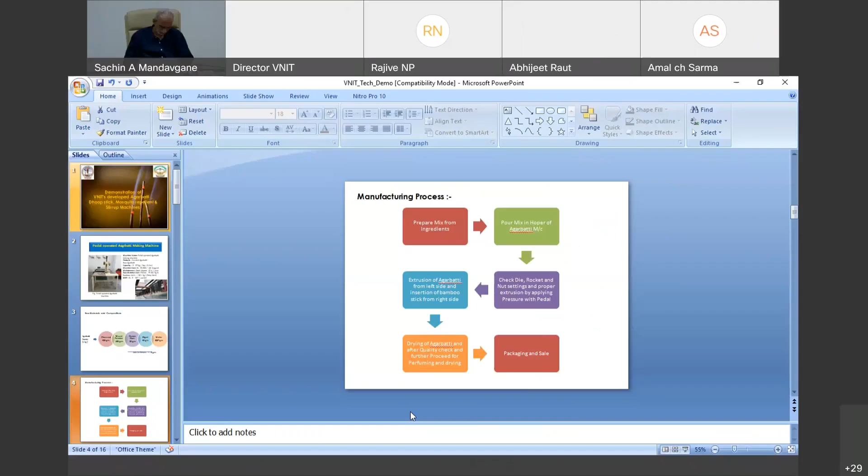Abhijeet's introduction is, as director sir said, Abhijeet is a PhD scholar at VNIT under the director. Second, he is a certified trainer for the agarbatti making machine, and he is contributing to different KVIC projects as well. So Abhijeet, please start.

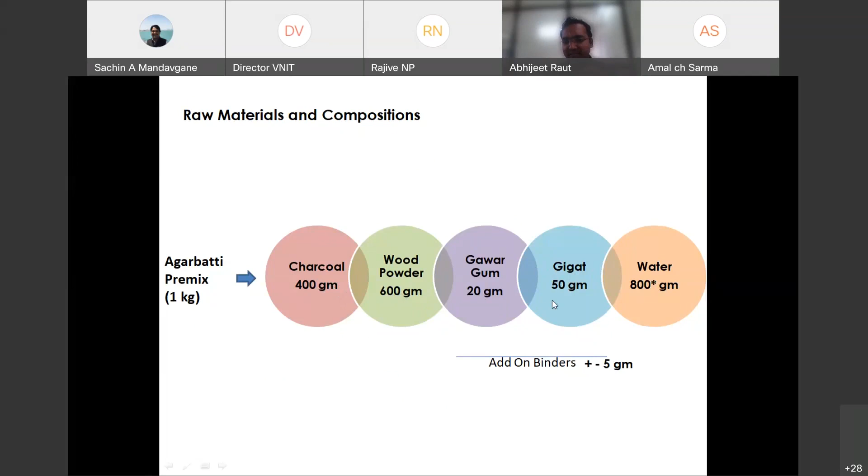Now we will move ahead. As I told you, for agarbatti manufacturing we require the premix, the mix of materials, the bamboo stick, and a machine for processing. So how is it done? First, initially we will prepare the mix. I'm going to demonstrate with a video, but initially let's discuss it in short. As I told you, these are the ingredients. We first mix it properly, initially charcoal and wood powder. Then we add the binder agent and pour the water, preparing the mix like an atta dough you have seen.

In such a manner we have to prepare the mix. After that, we need to pour that mix, masala we can say in local language, into the agarbatti making machine. You have seen this is the hopper, is it visible? We will pour that masala over here. After pouring the masala over here, we are going to move this handle. You can see my arrow is visible. Okay, so we will move this handle.

So with respect to this movement, the piston will move downward, and it will apply pressure on that dough.

After some time, as we feel the pressure, we will shift the movement of the hand on the pedal, and with the foot, we will apply pressure on this masala. After that, we need to do some adjustment for the extrusion. We will check whether this masala is coming out properly, and with respect to applying pressure, we need to check the extrusion properly.

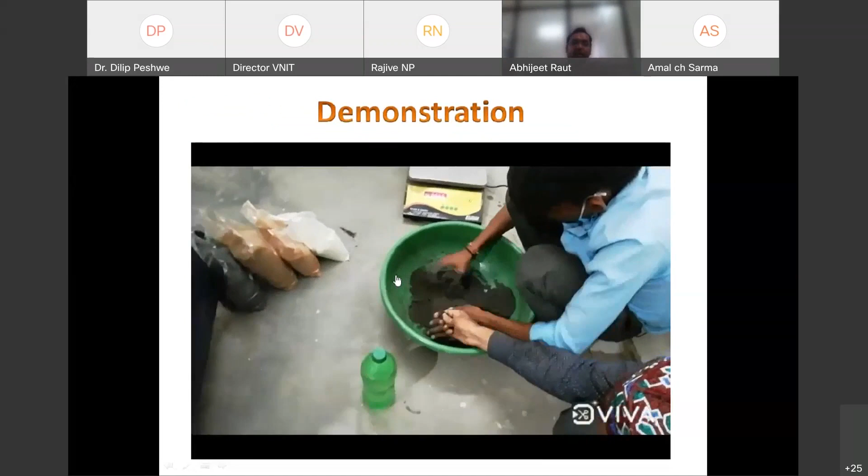Okay, understood. So now we are watching the demonstration. You can see we are preparing the masala, the mixture or premix. We take a tub and mix the various ingredients. This is for the black coating agarbatti, black premix.

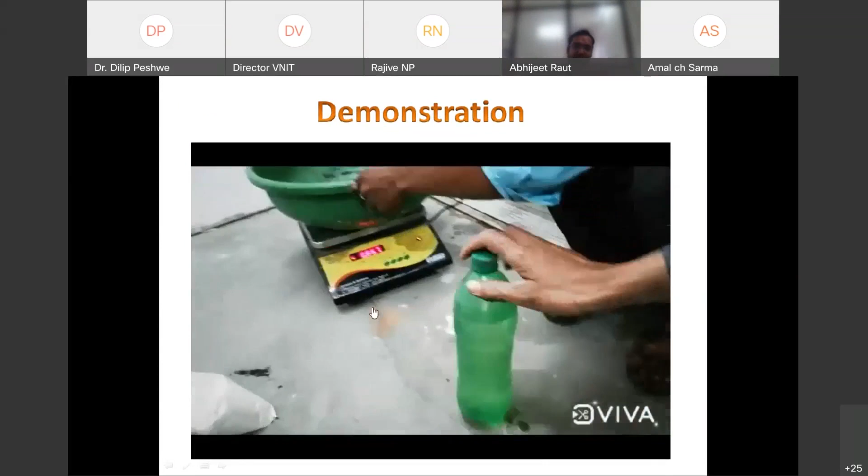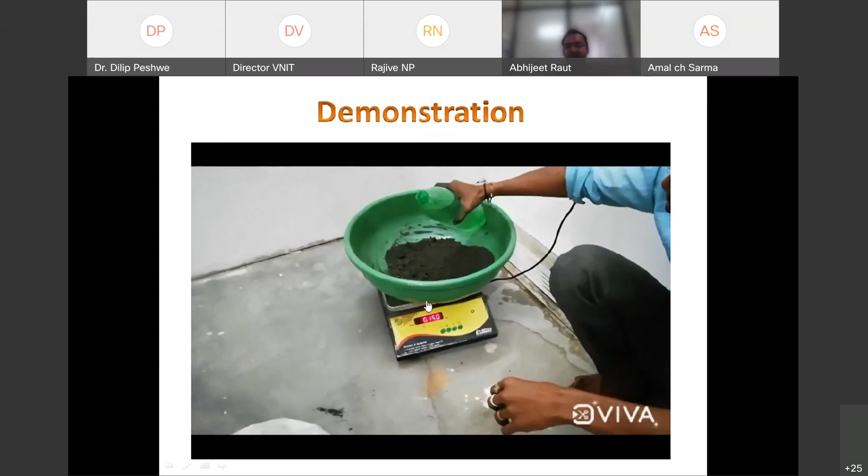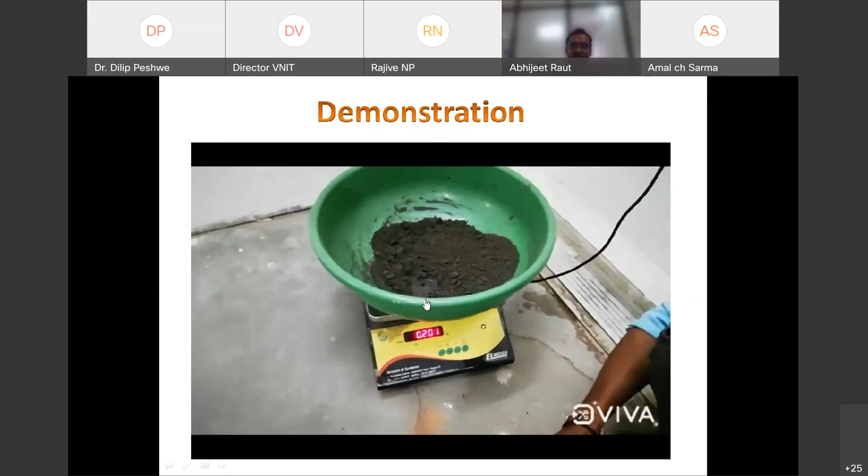You also require a weighing machine - this is a sample, so you can use any portable weighing machine. You can see we are pouring the water, so it is hand-based mixing. If the quantity is very small, you can mix it by hand, but if your production is very high and you require raw materials in tons, you can use a mixer machine instead. There are dedicated mixer machines with a reverse-forward arrangement for this mixing purpose.

It's as simple as the roti making you've seen in your kitchens. We need to prepare the dough like that. You can see this is the stack of materials.

We need to check whether it is bound properly. This is mixed properly, and finally after pouring the water we need to check like this - you can see the finish. We need to check that it binds like a laddu, you can see this checking also - it's like a sticky surface.

Then we confirm the material is okay, the mix masala is okay. You can see we are checking by making a laddu-like shape, and then with the thumb we check if it's sticky, how the surface is.

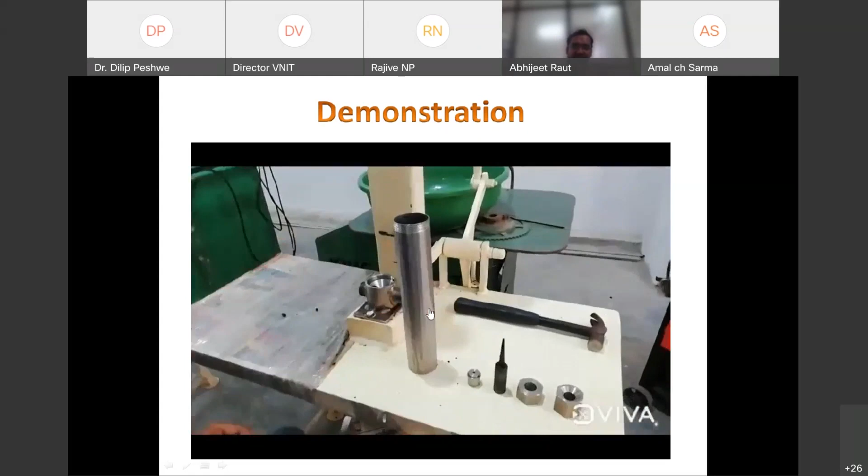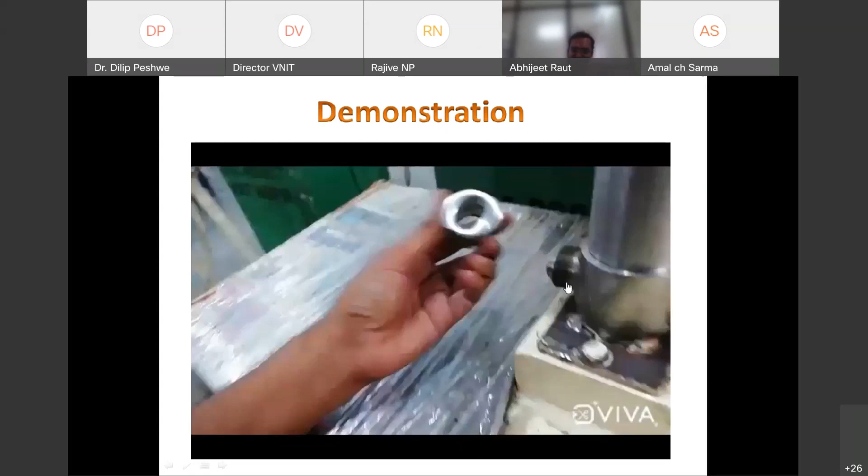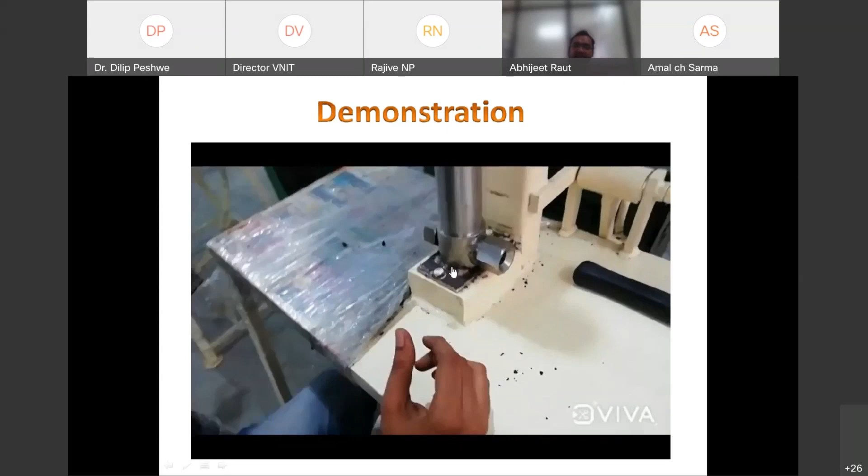You can see we will first incorporate the hopper assembly. This is a rocket, and this is a die. We will insert the die from one side. This is a small nut, as I said, and this is the big nut, the larger nut. This is the assembly, and we need to check it.

Initially, we keep it tight, and then as I told you, we need to check the extrusion. At that time, we move those clockwise, anti-clockwise, and set that proper assembly. Like you can see, there is a locking arrangement.

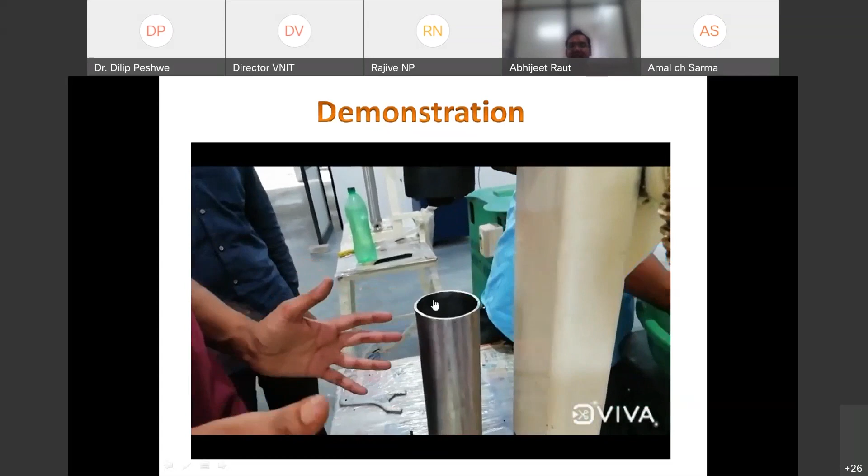This is the bush. We will be inserting this masala in this particular hopper. This is a bush which is going to apply the pressure over here. This is the handle.

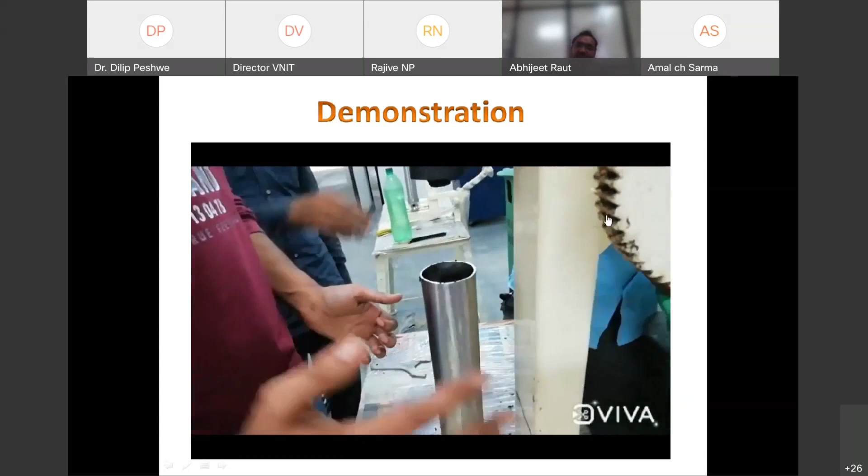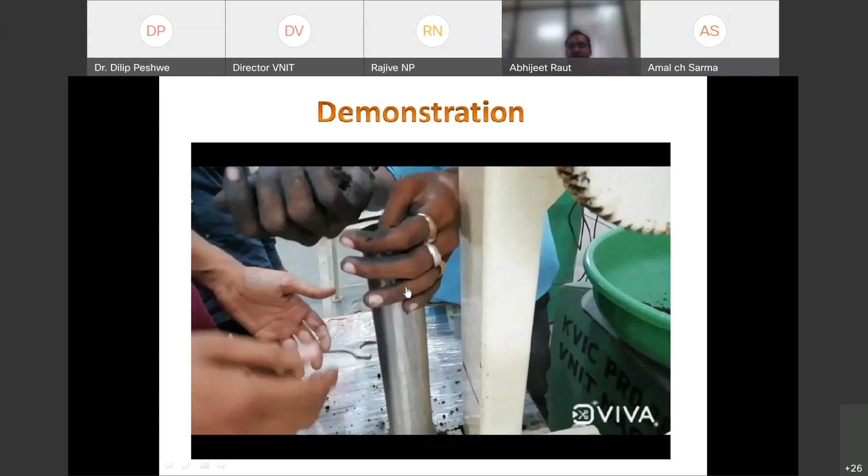Right side you can see this is a gear with handle. Initially we are going to apply the pressure with the help of this handle. 80% of the hopper we used to fill with that masala over here. Now see, after that we are going to lock that particular joint and we are moving this handle.

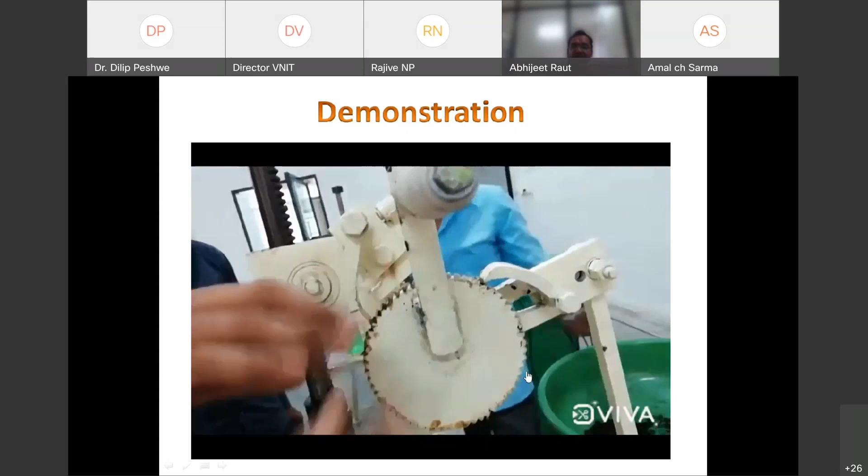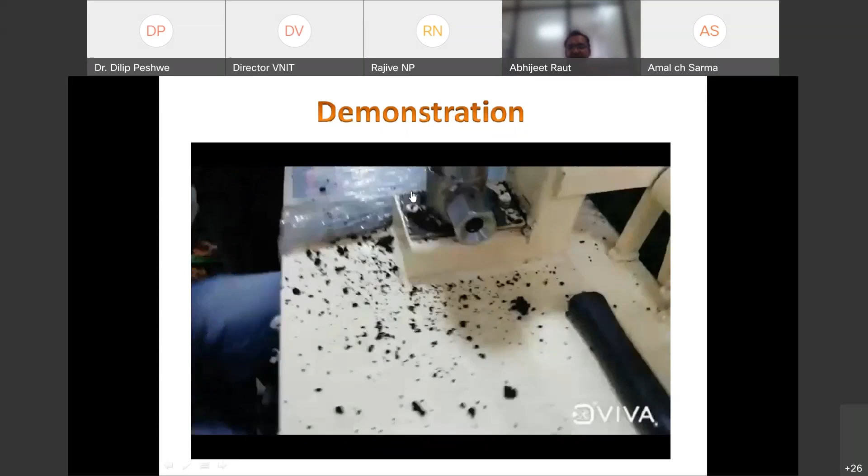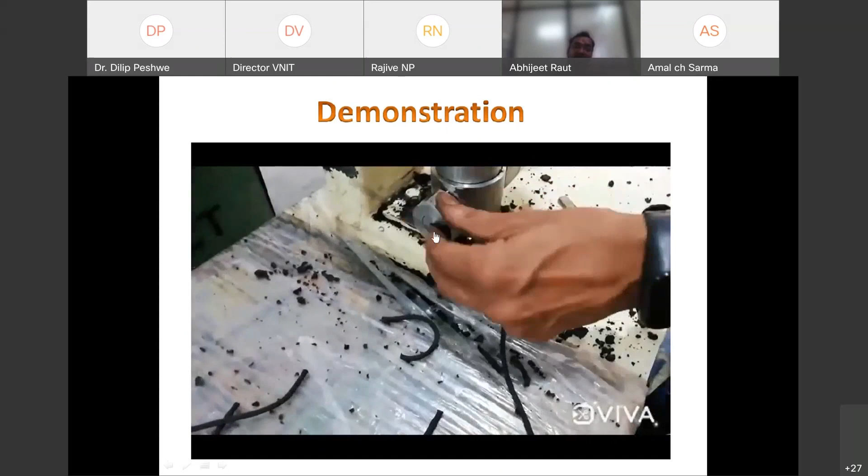And when we feel that there is some pressure, we need to shift on pedal, then we will apply the pressure with the pedal. You can see, before that we need to check the extrusion is properly done or not, and then we are inserting this bamboo stick from the opposite side, and this agarbatti will come out from this.

If there is a problem with the finishing of this coating, we need to set this nut arrangement. Sometimes what happens is if any ingredient, mostly water, or jiggat increases, it may affect the extrusion. So we need to set this setting as well.

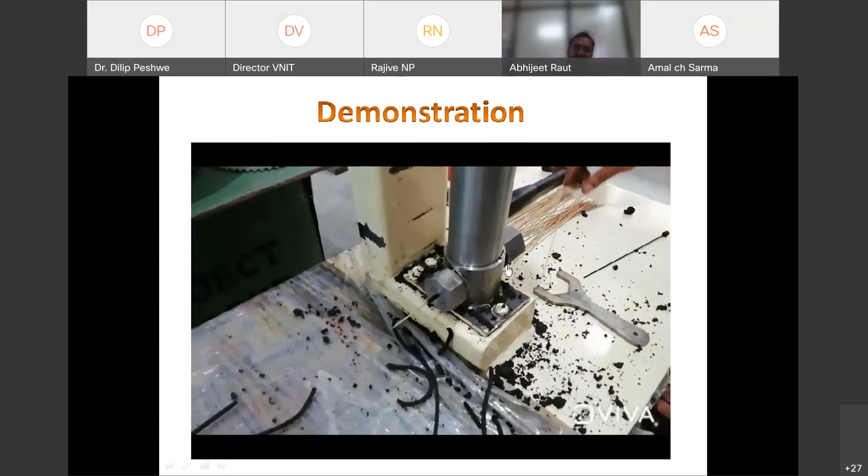You can observe this from another side. We are inserting the bamboo stick. In that fashion, we got the agarbattis.

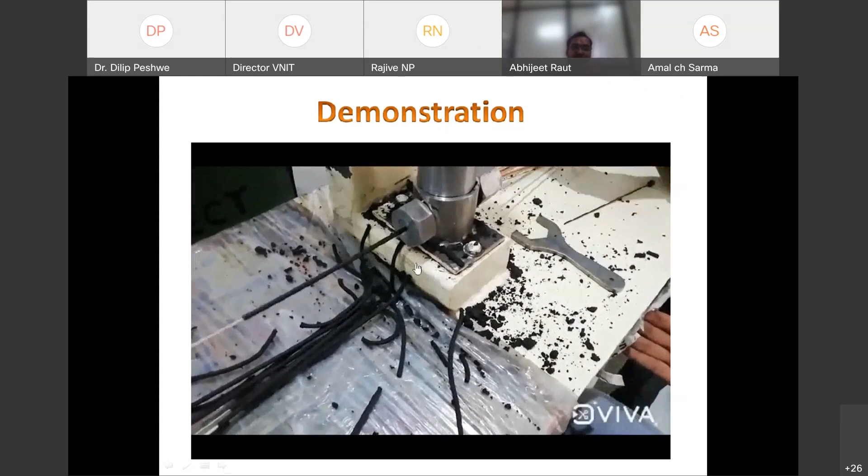Sometimes it also happens that there may be obstruction with the dust. So we need to maintain this every time. We need to remove that nut and we have to clean that die as well.

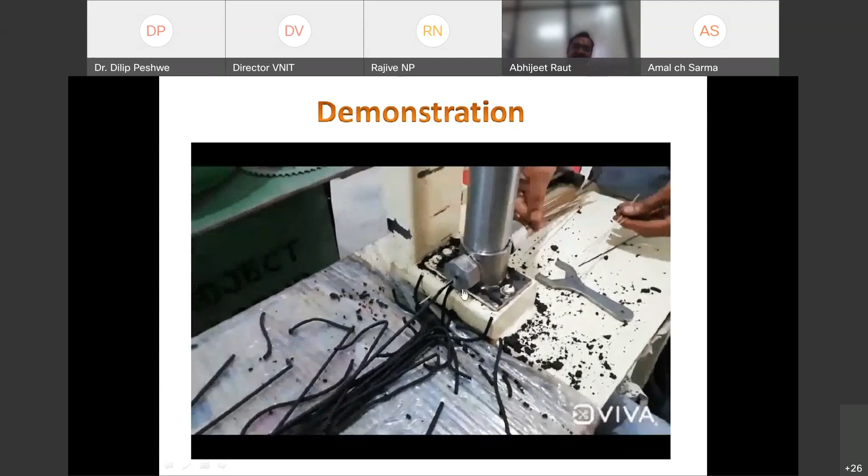There is no wastage. We can use this other coating again. We used to insert that remaining coating into the hopper again. So there is no wastage as such. So this was the agarbatti, which is very widely used in our country.

So our next technology, which VNIT has developed earlier, is the dhoop stick making machine, which is also useful for the aroma industry.

So you can see this is a manual dhoop stick making machine. The product, same as before, which we can produce from this particular machine, is dhoop sticks. Currently we are going to discuss the Gomay dhoop, organic, or we can say herbal dhoop, Ayurvedic dhoop. Those type of dhoop sticks we can develop with our machine, and even we can use...

...the agarbatti masala which you have seen. That type of masala also we can use as a perfume dhoop stick. So all types of dhoop sticks we can develop with this machine.

Machine cost is ranging from 20,000 at Nagpur. As I told you, transportation and packaging will be extra at another location. Capacity is 1500 to 2000 sticks per day.

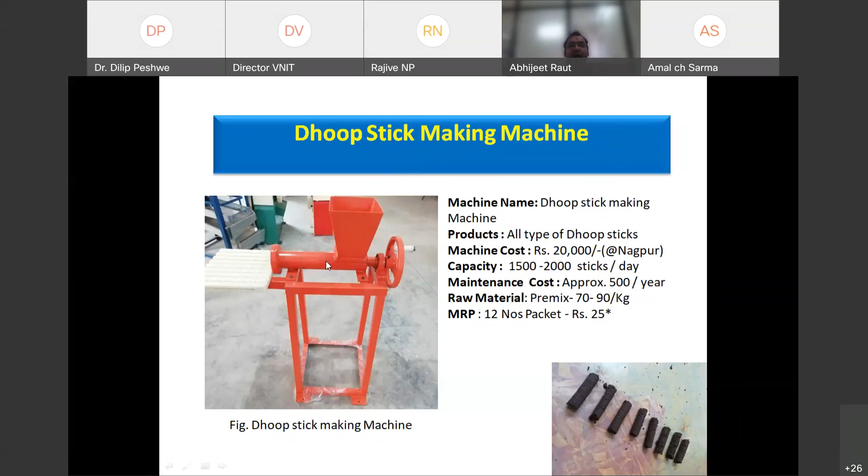After that there will be long sticks. Then we will cut them in a desired shape, and then drying - we keep it for drying. If needed, like for gomay agarbattis and gomay sticks, we dry them and directly sell after quality check. We don't do perfuming for these, as it is for ayurvedic and medicinal purposes. If we are using other premixes dedicated for fragrance, like you have seen in Zed Black, Rocket brands, we do the perfuming, and then packaging and selling. These are the steps for the dhoop stick making process.

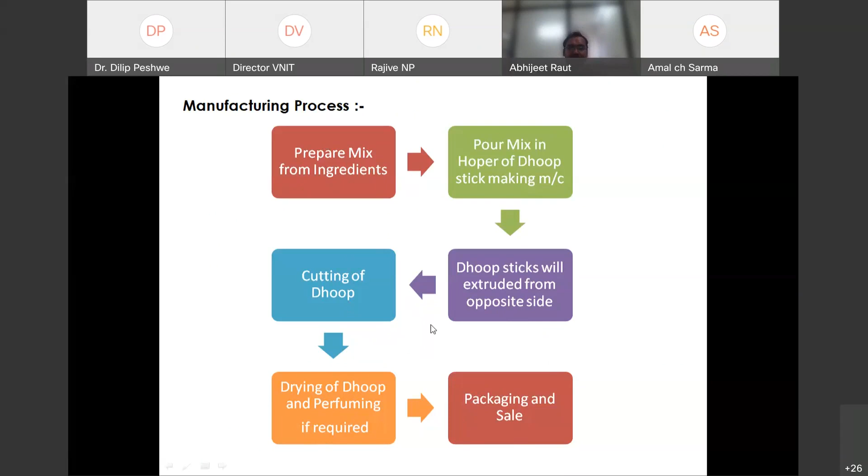We are seeing the actual demo as well. You can see.

This is the premix which we have prepared from the ingredients which I have shown earlier. We need to mix it properly so that it regains all the properties of the various elements. After that, all those materials are mixed, and then the liquid things we have incorporated to prepare the dough - like you can see this ghee.

We will incorporate the ghee initially, and then the gomutra as well. Like I told you in agarbatti making dough, we can check by making a laddu-like shape and then pressing the thumb. If the surface is sticky and smooth, at that time the check was done that the material is okay.

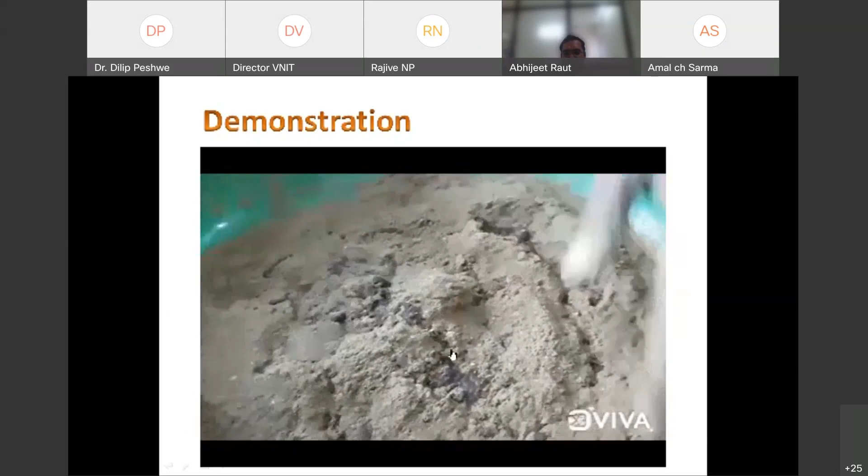Here you can see the gomutra we are pouring into the mix. The change will be with respect to the color of that particular masala premix - earlier it will be a little lighter, and after mixing for some time it becomes darker in color. Here we can also pour a little amount of water if needed, or increase the quantity of gomutra, and it also depends on the weather condition.

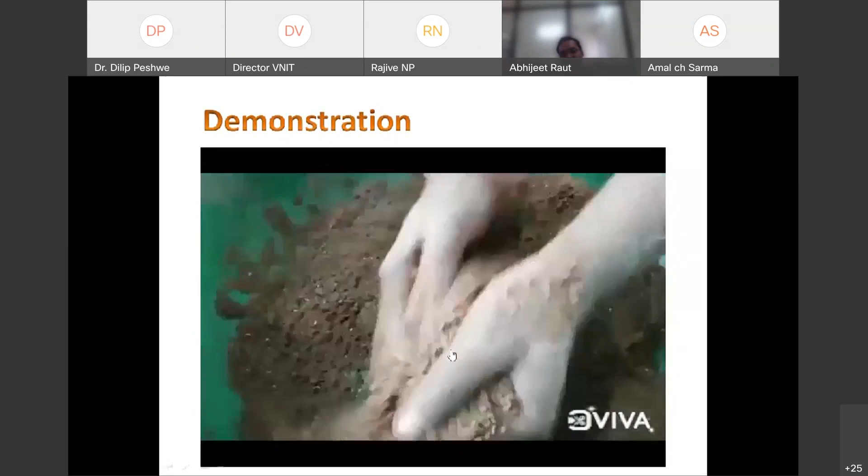Even many times it happens that extrusion is not proper in agarbatti, in dhoop stick as well, so we can change or increase the ingredients.

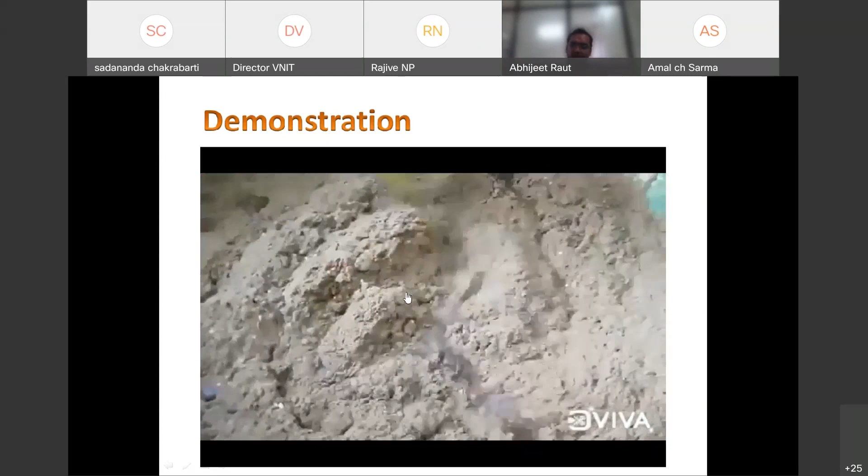Some manufacturers also add some guar gum, as I told you in agarbatti making machine, in the metal of agarbatti. So we can add guar gum as a binder if required.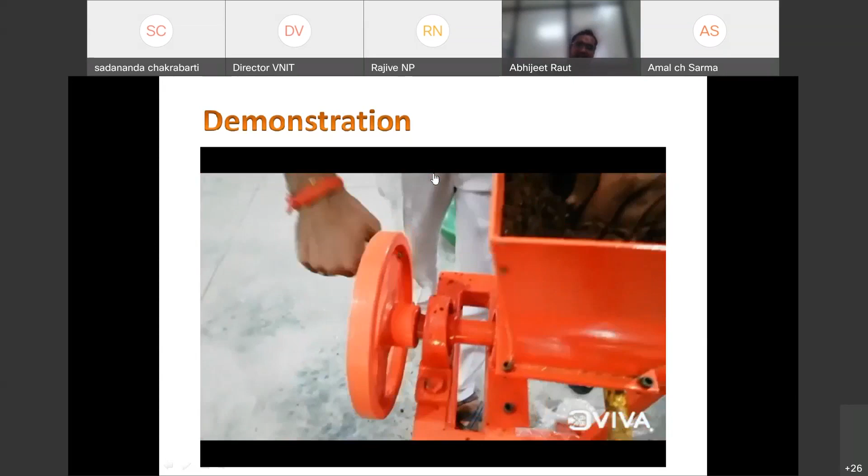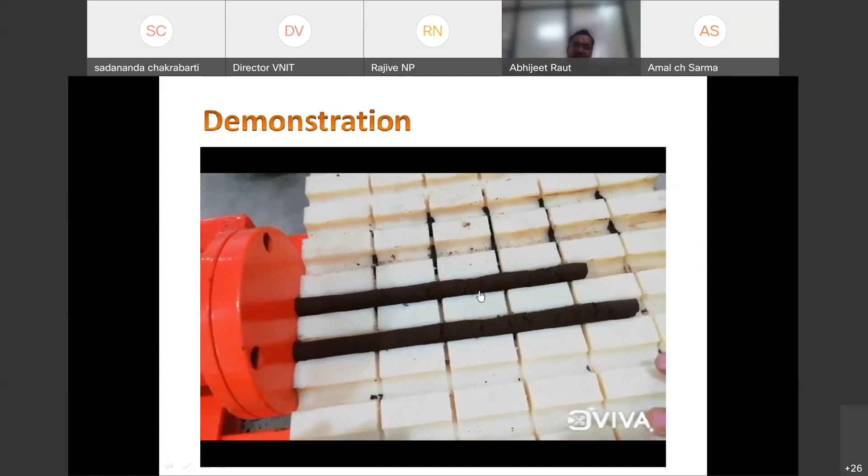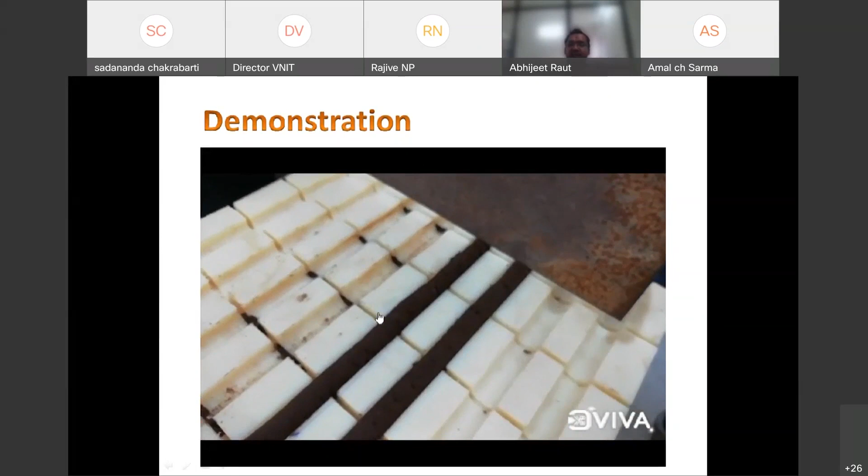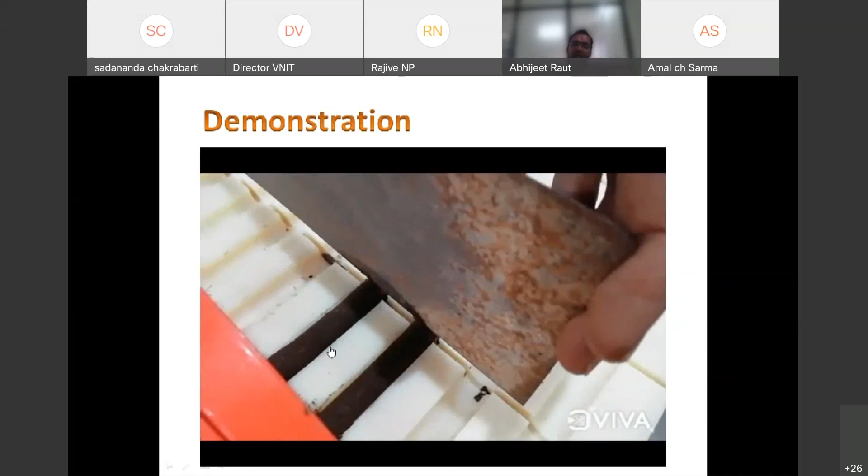Further, for the actual manufacturing of dhoop stick, we will pour that masala into the hopper, and as soon as we apply pressure through that particular handle, this extruded dhoop stick will come out from these holes. After that we will cut from these slots, as per the dimension needed - from the cutter we can cut it, and you can see the dimension as per the requirement. We can change the slot. In that fashion we will cut it, and then we will remove it from that particular platform.

Okay, in that fashion we will get done. That was about the dhoop stick making machine.

Here also we can produce mosquito repellent coils like Gomay mosquito repellent coils, as well as inorganic ones where we used to use various chemicals.

Machine cost is 40,000 in Nagpur. Capacity is approximately 360 coils per day. It depends on the mixing time, as that is the main time consumed. But once the mix is ready, we can produce multiple coils, approximately 360 coils per day in 7 to 8 hours. Maintenance cost is the same, 10% per year required.

Raw material current costing is 120 to 150 per kg. It is a premix. As I told you earlier, it depends on the area, city, and the market condition.

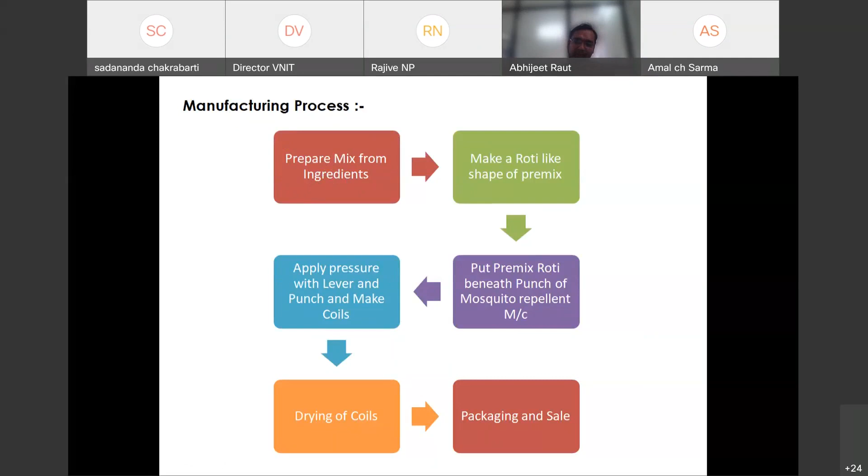Then we'll put that roti - I'm showing you here - initially we will prepare the roti-like shape from that particular premix, then put that roti beneath this punch, and apply pressure with this lever.

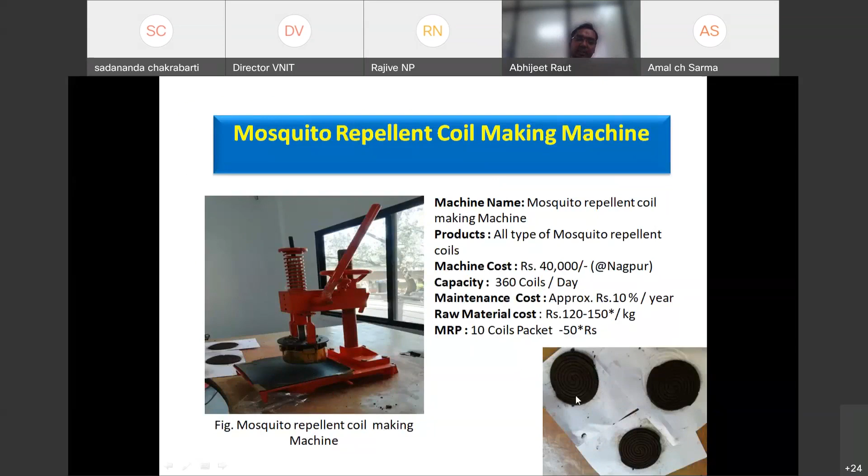As soon as we apply the pressure with the lever, it presses on that roti and it regains that particular shape. I'll show you in that particular video.

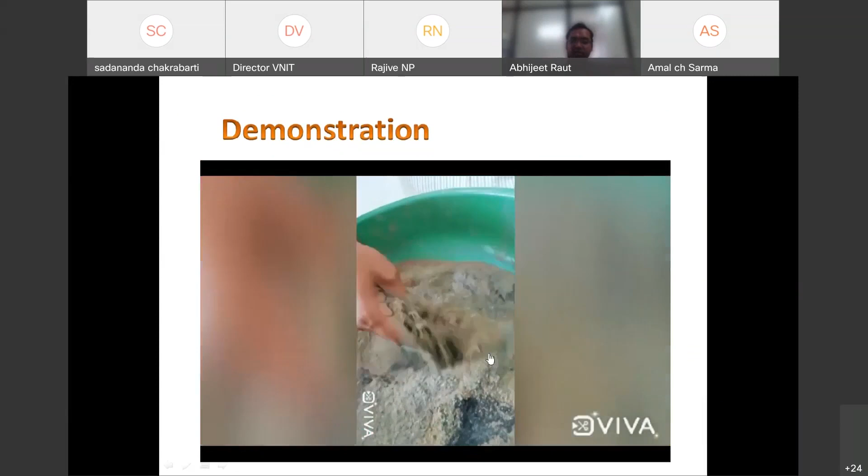You can see here, same here also - we will prepare the mix from various ingredients. You can see this black, gray color mix. We need to mix it properly.

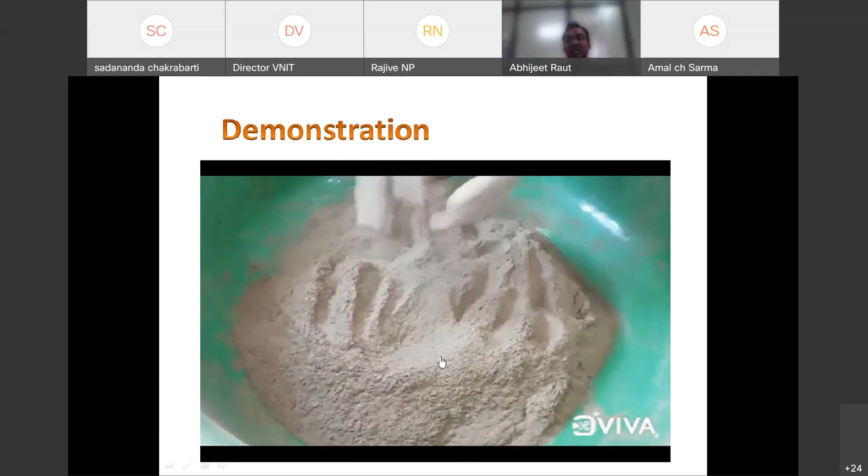Once those ingredients or elements are mixed properly, we will pour the liquid content. In mosquito coil making, the liquid contents are neem oil and lemon oil. That bottle mix of neem oil and lemon oil has been poured into this mix.

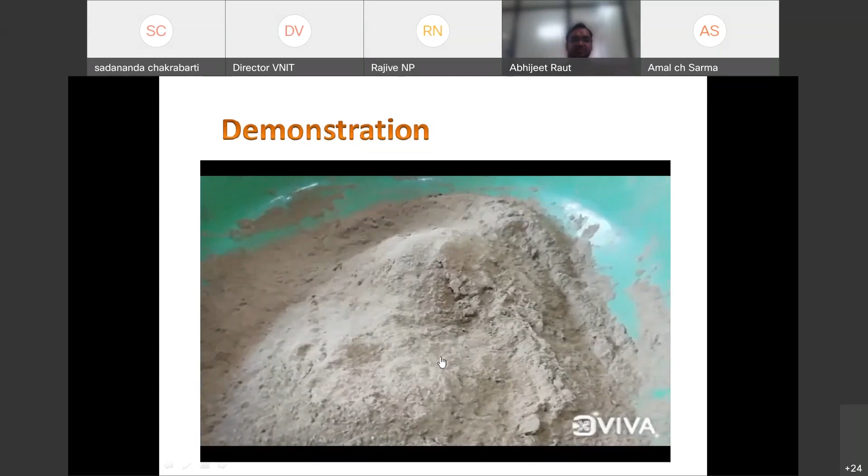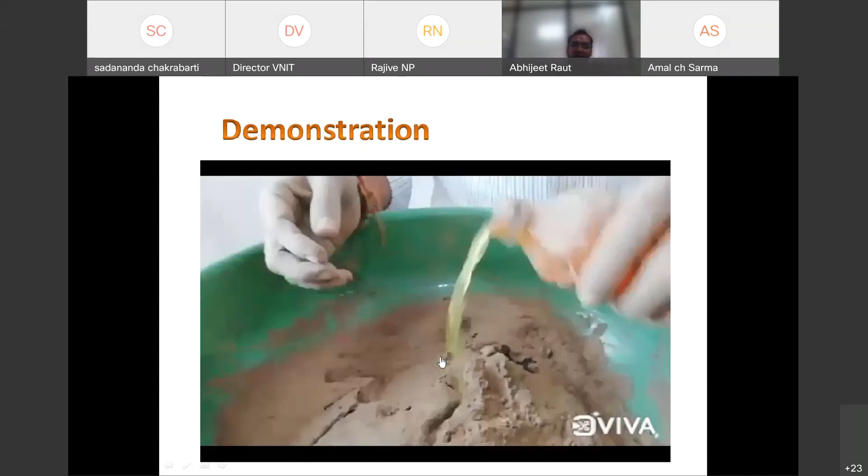In addition to that, we will apply the gomutra as well - see, this we have applied now. Then we'll mix it properly again. Mixing generally takes more time, and the main processing of the mosquito repellent coil is a little faster.

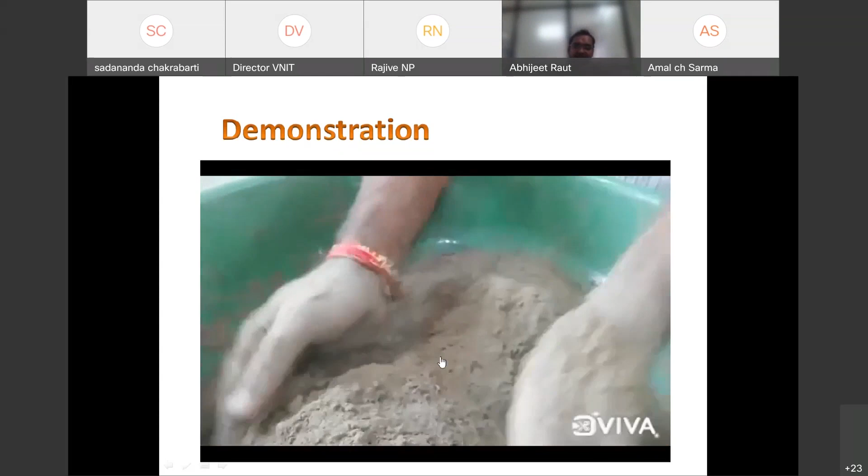Same here also, we will try to mix it properly along with the liquid. And here, like we need to check it exactly similar to how we make rotis in the kitchen, as the next step is to prepare the roti-like shape. So we need to prepare the dough in that fashion only.

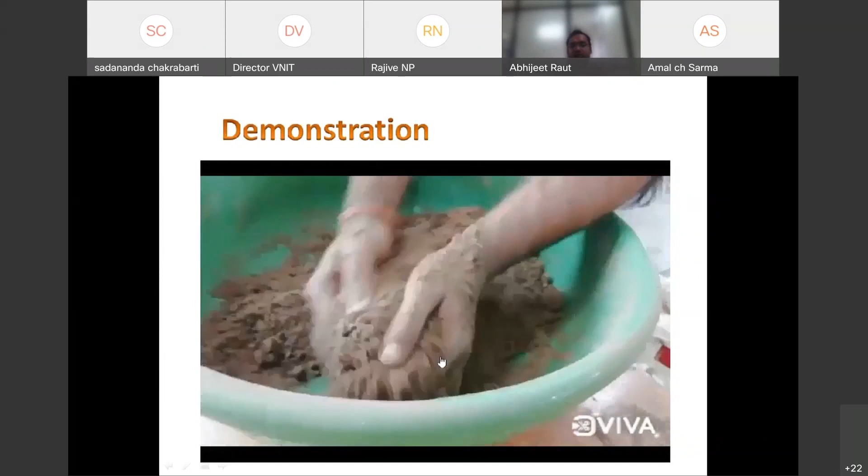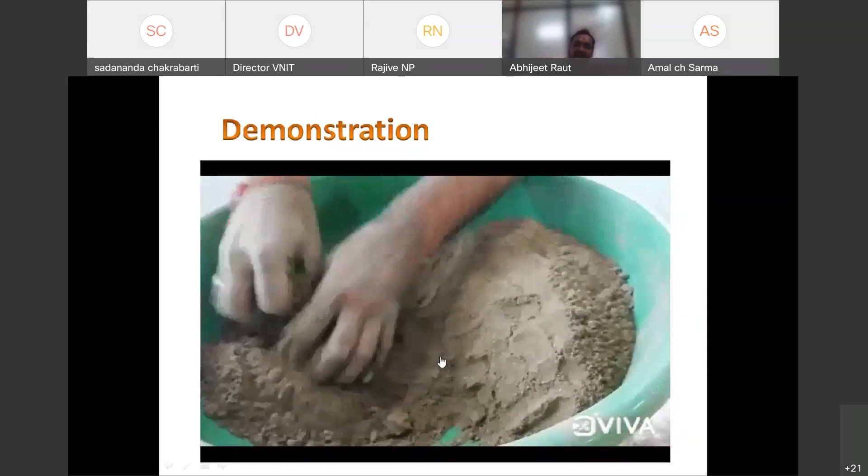There is no exact formulation. The proportion is a range only, in terms of ingredients. With experience and based on output, we can change the composition proportion. Everyone has their own trade secret of this composition. Also, with respect to problems we face while processing and weather conditions, we need to change it.

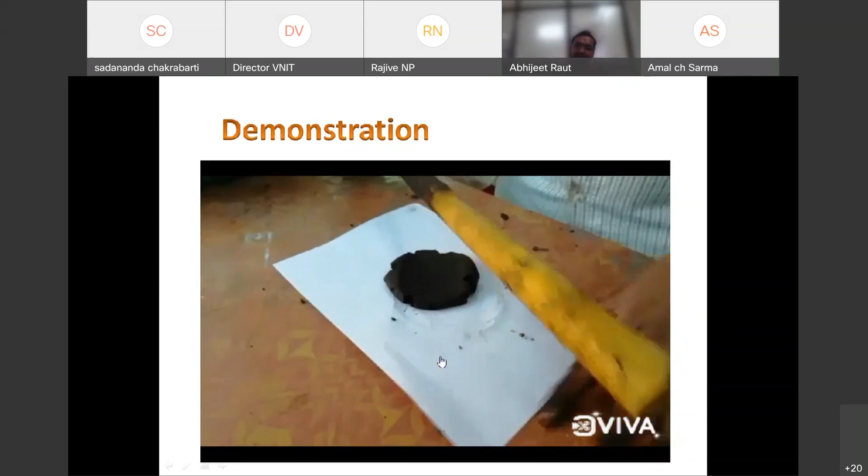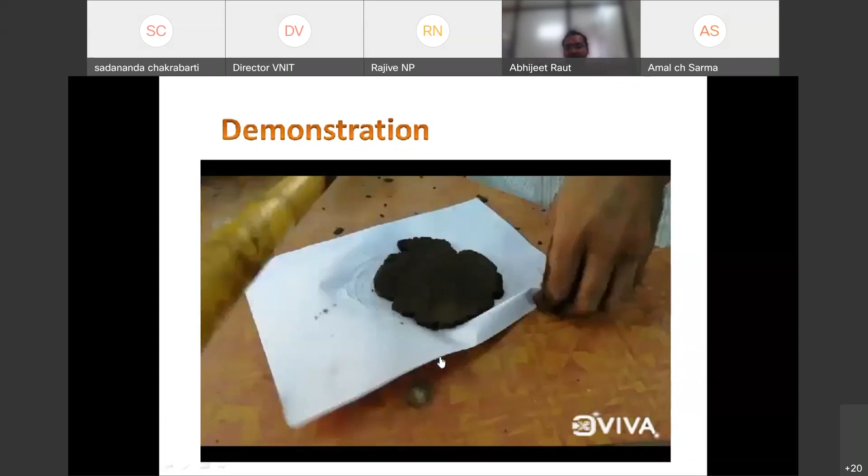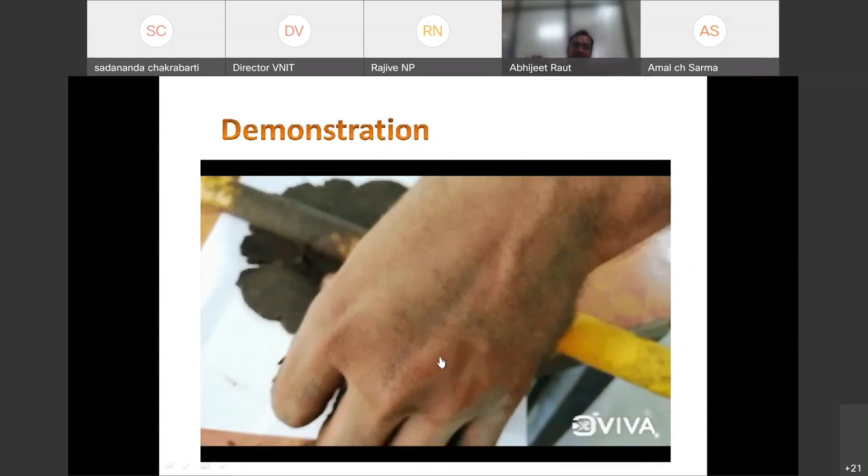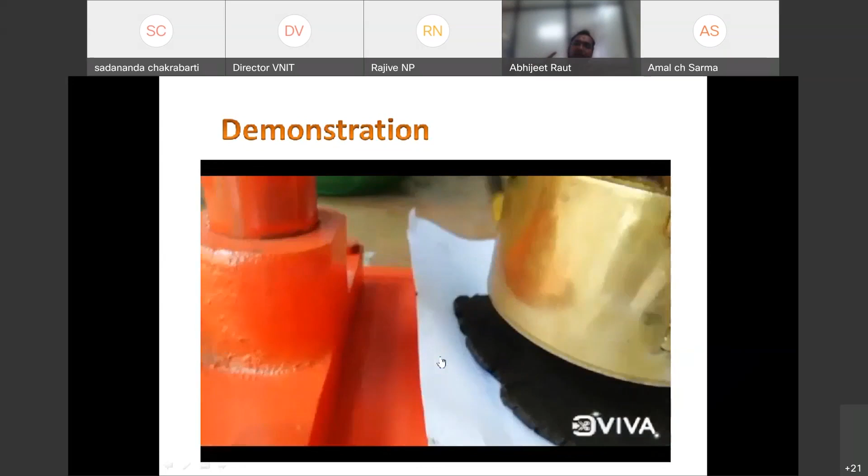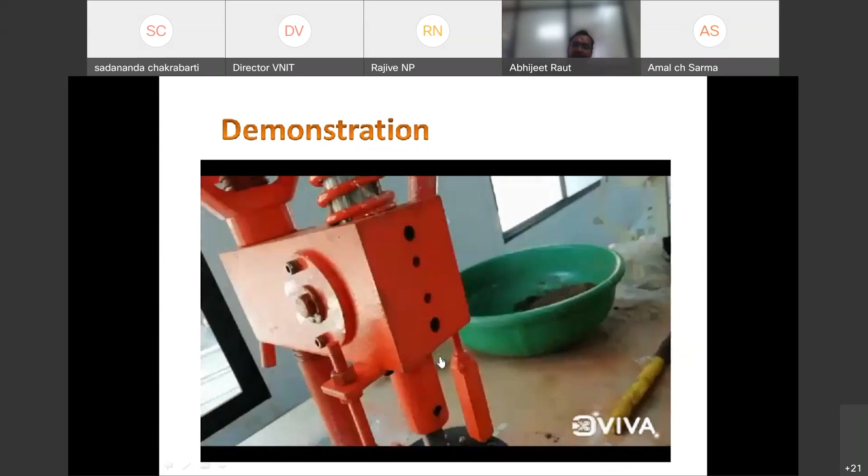Then, as I told you, we need to keep that roti-like shape beneath the punch. We apply pressure with the help of a lever to get the desired shape. You can see we are pressing this lever with the press mechanism. It will reflect to that punch, and we will get the exact desired shape. Don't worry about the wastage mix, we can reuse that.

You can see these are the 2 coils we are producing at a time. That was about the mosquito repellent coiling. Next and last, the technology which we have developed for the construction industry was the stirrup making machine.

You have seen stirrups used in the construction industry, at construction sites, while making columns and support scaffolds. These stirrups are developed with the help of iron rods. This is the machine we have developed, the stirrup making machine. The product will be stirrups. Machine cost is 90,000 at Nagpur. Capacity is 850 to 900 numbers per day, meaning in 7 to 8 hours.

So I'm showing you the video. Initially, we developed the pedal operated stirrup making machine so that the hilly regions where there is no power supply can afford it. You can see we need to incorporate a bar over there, and there is a die which bends that particular bar. This was the pedal operated stirrup machine.

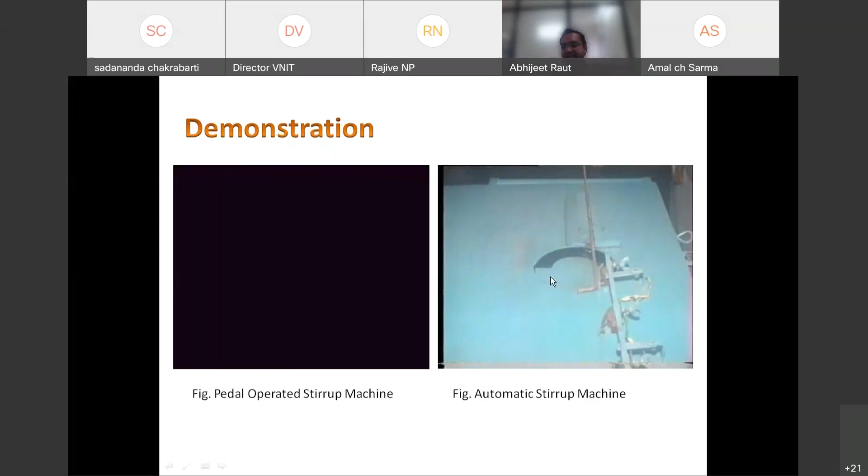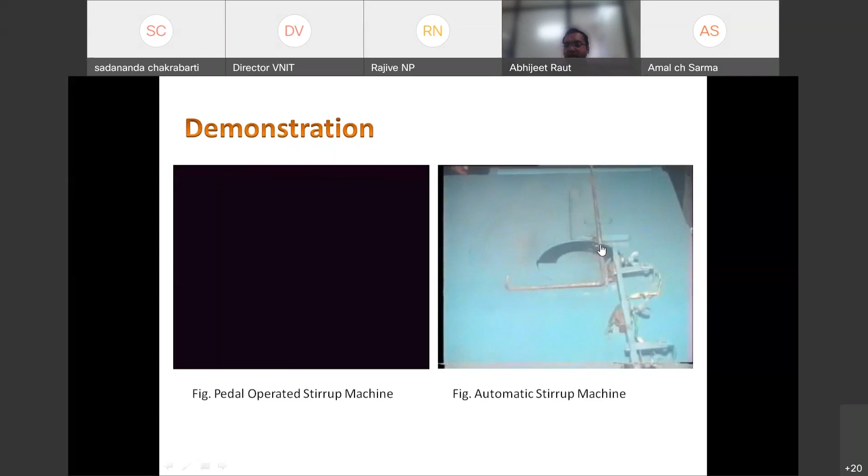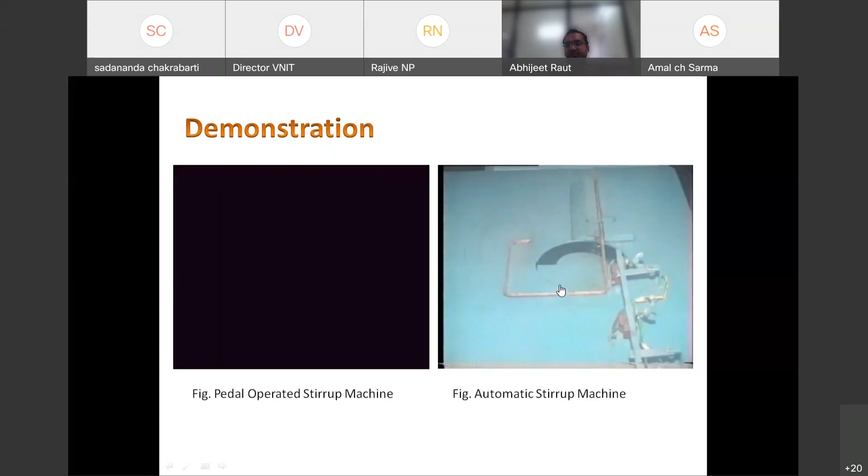Then we modified this technology and developed the automatic stirrup making machine where motors are used and the process is automated. You can see we are inserting the iron rod here, and then there is a die. See the arrow, it is applying pressure on that particular corner, at that particular dimension length, and then it gets the desired shape. This is the stirrup we can produce.

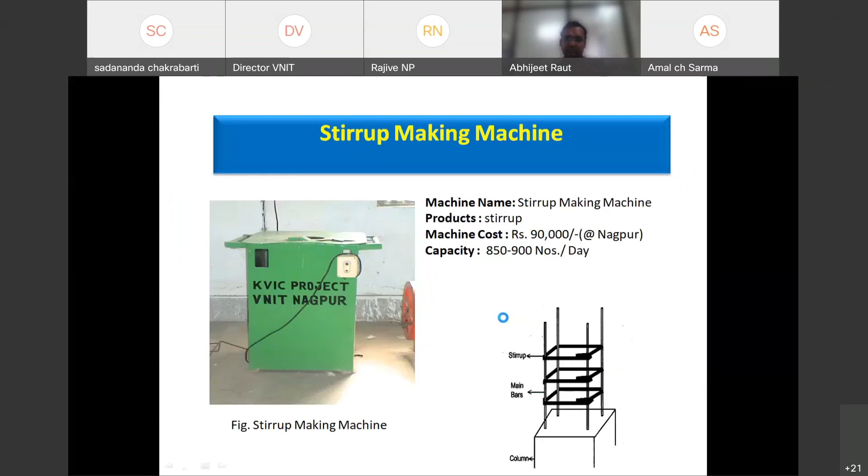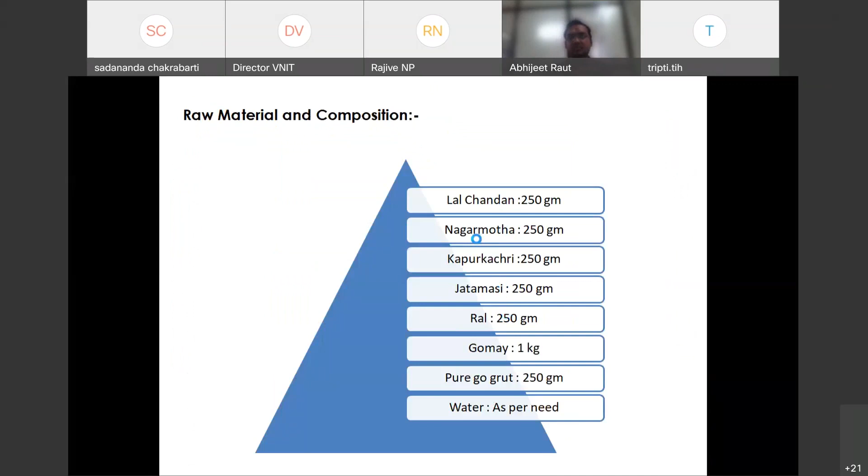Any questions? I am Dr. Tripti Singh from Bhopal. I need to ask, from where can we purchase these machines? Are they available in the market, or do we have to contact VNIT for these things? You can contact Vibhavani for that, we will arrange it. Okay, sir.

Namaskar, I am Deepak Pandya from Vadodara, Gujarat. I just wanted to know the economic parts of it, because the raw material, machinery, how it works, how to manufacture it, but the real costing, as VNIT knows everything about it. So we just wanted to know the real costing and what will be the market price, so that we know what will be the profit structure. This is just what we wanted to know from Dr. Abhijeet, please. Thank you, Abhijeet.

Yes sir, like as I said, economics means particularly for the machine or the end product. Entire product, all four machines and all entire products, if you wanted to do it, if you wanted to set up a small scale unit for a group of women, and if you wanted to use them as a business, that business model and exact economics will be shared with a flowchart later on by our team. But currently, that's why I have mentioned these costs, like machine cost, you can see one woman can use this particular machine, that single machine. And as I told you, the production will be like 10 kg per day.

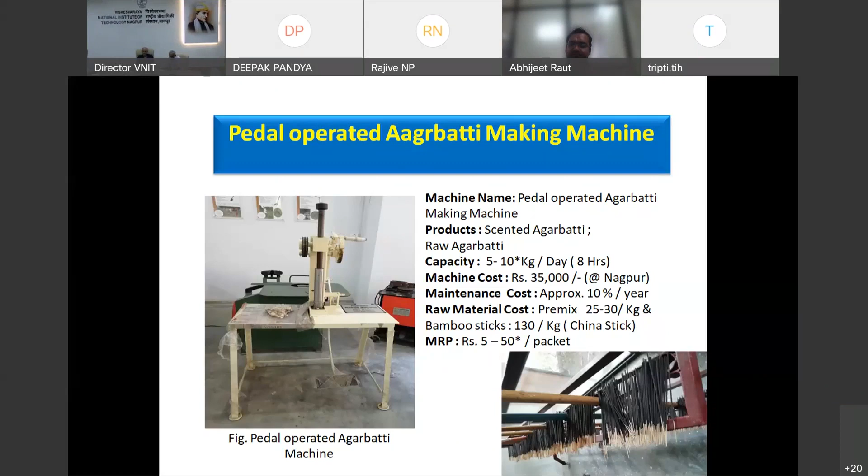I think the presentation is self-explanatory, and we will have more queries when we have some actual physical training. That is very much required. Yes, so we will identify those participants who are interested in setting up such units, and we will conduct some physical training either in their locations or in the VNIT campus, whichever is practical and possible.

I think we can go to the concluding session of this training program. We are expecting a series of technologies either from VNIT or other institutions, so that we can have a list of technologies which will provide some scope for enterprise model and livelihood. And National Innovation Foundation, which I am also part of, has also shortlisted some technologies for grassroots enterprises. Likewise, VNIT can identify more and more technologies.

Already you have a list of technologies, so one by one we will start. We will actually focus on implementation. This is only for creating some awareness.

I am glad that around 10 to 12 states are participating in this training session, and around 22 organizations are there, and some individuals have also joined, including some social entrepreneurs. I think this training program was impactful as an initial step. We will go for more programs in future. Thank you.